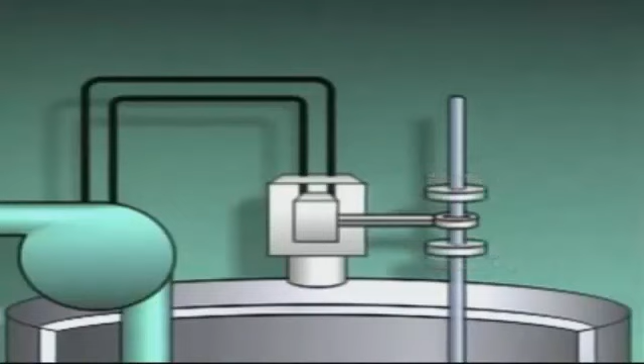The dead zone in this system is controlled by the positions of the two float rod collars. The dead zone can be reduced by moving the two collars closer together. A smaller change in level will then turn the pump on or off. But even though the water will be maintained at a more constant level, the pump will turn on and off more frequently. And this overuse could damage the system's components.

With proportional control, a controller's output signal is proportional to its input signal. In other words, if the input to a proportional controller changes by a given amount, the controller's output will also change by a given amount. To explain proportional control, we'll use this illustration of an automatic level control system. We'll say that a temporary disturbance decreases the demand for water from the tank and causes the water's level to briefly surge above its set point.

As the water rises, a level-sensing float converts the change in level to mechanical motion. The motion is detected by a measuring element or transmitter and converted to a pneumatic signal representing the value of the higher water level. This signal is sent to the controlling element or controller. The controller measures the signal, compares the signal to set point, computes the difference between the two values, and produces a corrective output signal that's proportional to the input signal.

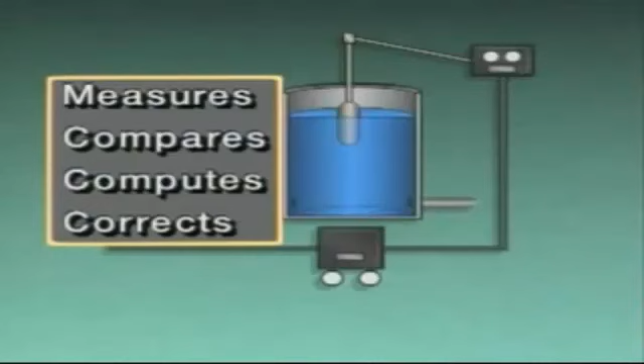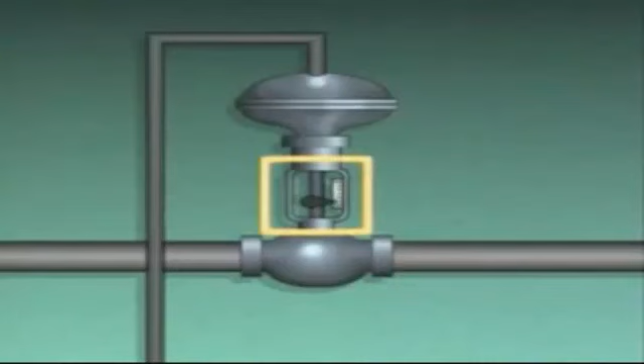The controller sends that signal to the final control element in the system, a control valve. The control valve responds by closing down to decrease the flow of water to the tank. However, because of process characteristics such as resistance, capacitance, and dead time, the level fluctuates before it finally returns to set point. We can tell more about how the temporary change in water level affected the system if we plot the control signals on a graph.

On the graph, the scale on the far left is marked off in feet to indicate the water level in the tank. The next scale indicates the value of the input signal to the controller in pounds per square inch, or PSI. The scale on the right indicates the value of the output signal from the controller. It too is in pounds per square inch. The dashed horizontal line represents the set point for the water level. In this example, the set point is 3 feet, which is equivalent to a 9 psi input signal to the controller and a 9 psi output signal from the controller.

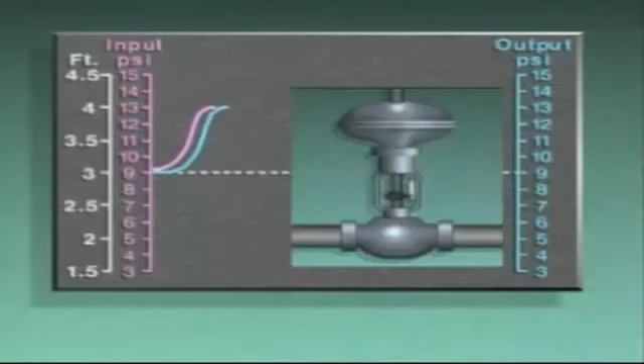In this case, it increased to 13 psi. The output signal caused the control valve to close, decreasing the supply of water to the tank. As the level in the tank fell, the input and output signals decreased accordingly. However, the process characteristics that we mentioned caused the signals to go through several fluctuations or cycles before returning to set point. With a temporary disturbance, process conditions return to their original state. So a proportional control system can normally return the controlled variable to set point.

But if a continual disturbance occurs, a proportional controller may not be able to restore original conditions. For example, this graph shows the input and output signals when an ongoing decrease in demand caused the level in the tank to rise. In this example, the control system brought the process back under control. But when it did, the level stayed higher than the original set point. That's because the input signal to the controller increased, then stayed high because of the continual disturbance. As a result, the proportional output signal stayed high as well.

The higher steady state value that resulted, that is, the higher level that's represented by the input signal, is called the control point. The difference between the variable's control point and its original set point is called offset. Offset occurs because a proportional controller produces only enough output to bring a process back under control during a continual disturbance. It may not produce enough output to overcome the disturbance and return the process variable to its original set point.

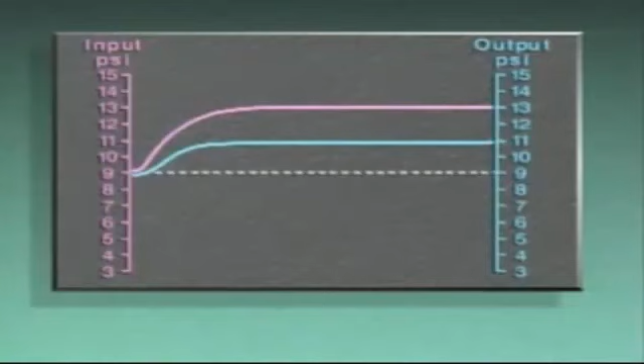Now, the signals on this graph show a proportional band that's greater than 100%. This type of proportional band is called a wide proportional band. With a wide proportional band, a large change in input to the controller produces a smaller change in output. The proportional band for this example is 200%. Since the output signal changes less than the input signal, a wide proportional band can minimize the amount of cycling in a system. However, there's more offset with a wide proportional band.

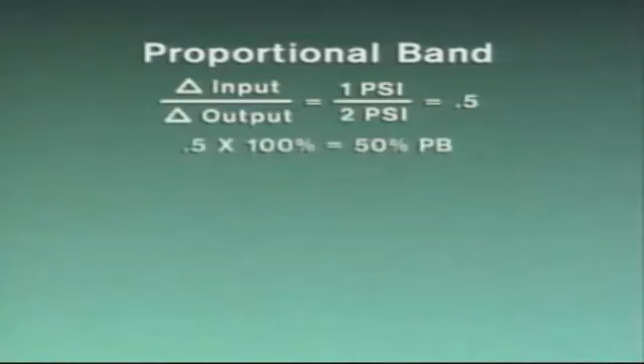Some manufacturers use the term gain when describing a proportional control adjustment. Gain is the inverse of proportional band, and it's expressed as a quantity rather than as a percent value. For example, a 1 psi change in input that produces a 2 psi change in output represents a 50% proportional band. But since gain is the inverse of proportional band, the relationship between the change in input and output is reversed. So the gain in this example is 2.

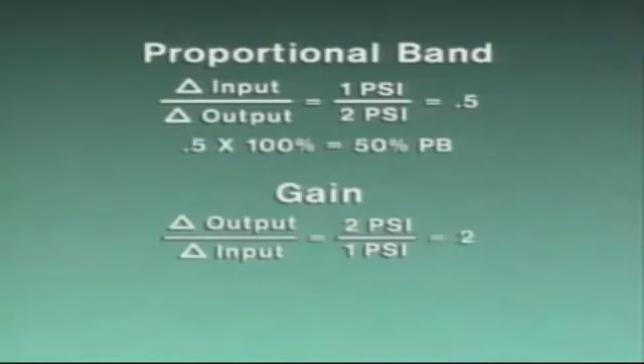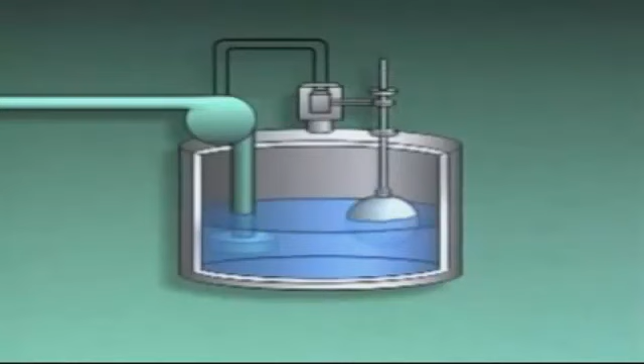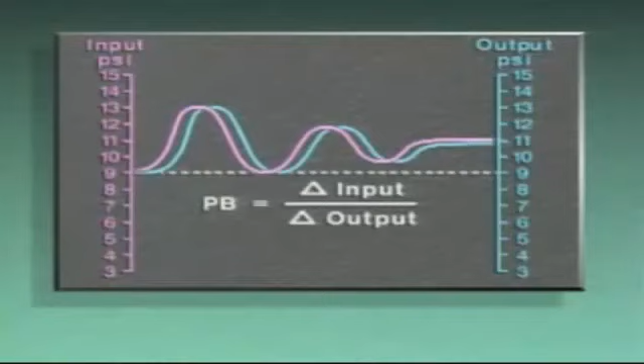Not all control modes can return a controlled variable to set point after a process disturbance. However, reset control is designed to adjust the output of a proportional controller to help eliminate offset and restore original process conditions. Reset action responds to a controlled variable's deviation from set point by increasing or repeating the amount of proportional control until the variable returns to set point.

Reset control doesn't exist without proportional control. In fact, it's actually proportional plus reset control, since it adds an additional corrective action to the proportional action. Also, reset control is sometimes called proportional plus integral, or PI control, because it's based on a mathematical function called integration. In any case, it's easier to understand how reset control works by looking at an example.

In this arrangement, an automatic control system is used to maintain the level of water in a tank. The input signal from the transmitter to the controller represents the level of water. The output from the controller adjusts a control valve in the supply line to the tank. If a continual disturbance causes a decrease in the flow of water from the tank, the level in the tank rises, and the input signal to the controller changes to reflect the higher level.

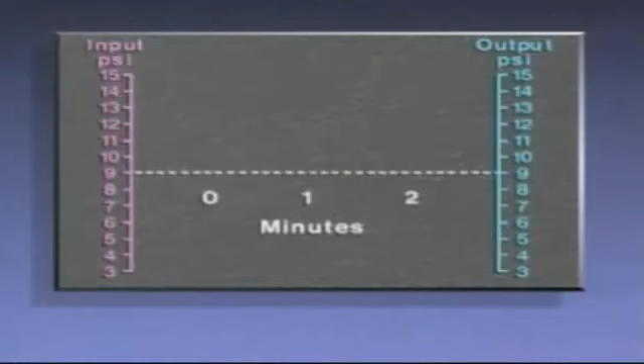During the first minute, the increase in water level caused the input signal to the controller to increase from 9 psi to 11 psi, which is a change of 2 psi. During the same 1-minute interval, a proportional-only controller with a 100% proportional band would have produced an output signal that matched the input signal. But the output signal from this controller includes proportional action plus reset action, and it increased to 13 psi, a change of 4 psi.

What this means is that the reset part of the control action increased or repeated the 2 psi proportional action one time in 1 minute. This is sometimes described as 1 minute per repeat, or 1 MPR. As the level of water in the tank dropped, both signals decreased, then fluctuated briefly before returning to steady state.

That's because the value of the control variable, represented by the input signal, returned to its original set point of 9 psi. In our example, a reset control action of 1 minute per repeat was able to return the controlled variable to set point. Often the amount of reset in a system can be adjusted. However, a reset that's too fast can cause a controller to overcorrect and cause the process variable to cycle out of control. In those cases, a slower reset may be needed.

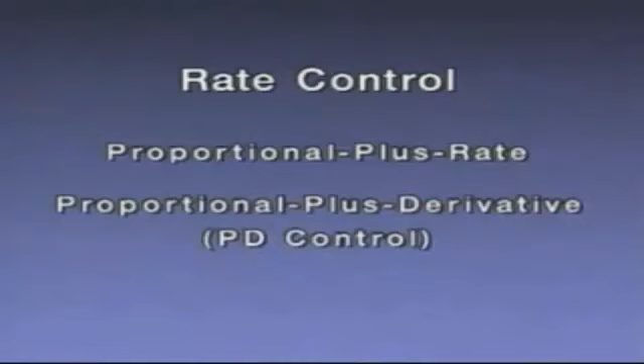In any case, when a process disturbance causes the input signal to a rate controller to change, the controller measures the speed or rate at which the input is changing and produces an instant boost to the proportional output signal. In effect, this action tries to stop changes in the input as soon as they're detected.

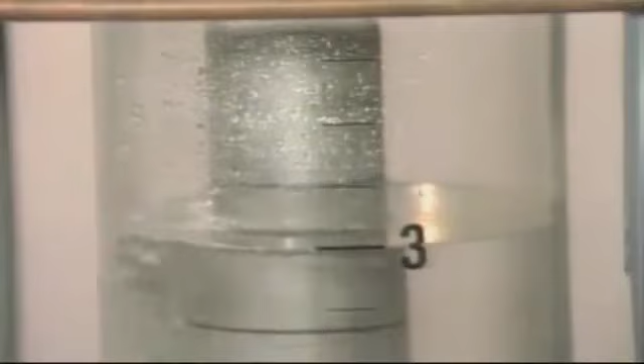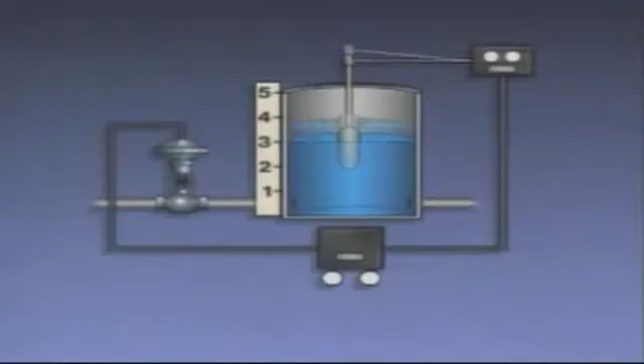To get a better understanding of rate control, we'll use this automatic level control system in which rate control has been added to a proportional controller. We'll say that a continual disturbance causes a decrease in the flow of water from the tank, which in turn causes the level in the tank to rise. If we look at a graph of the control signals from the process, we see that the rate controller responds to the disturbance by producing an immediate boost in output. This boost minimizes the water level's deviation from set point.

Then, a combination of rate control and proportional control stops the water level from changing and brings it down almost to set point. However, because rate control responds only during changes in the input, and because proportional control only provides a proportional output, there may be some offset in the process variable. In other words, as long as the level is at steady state, even with offset, the rate controller will not provide a correcting output.

When a process requires a rapid control action that eliminates offset, a control mode known as proportional plus reset plus rate control may be used. It combines the precise response action of reset control with the fast response action of rate control. Proportional plus reset plus rate control is sometimes called PID control. P for proportional, I for integral, which is the same as reset, and D for derivative, which is the same as rate.

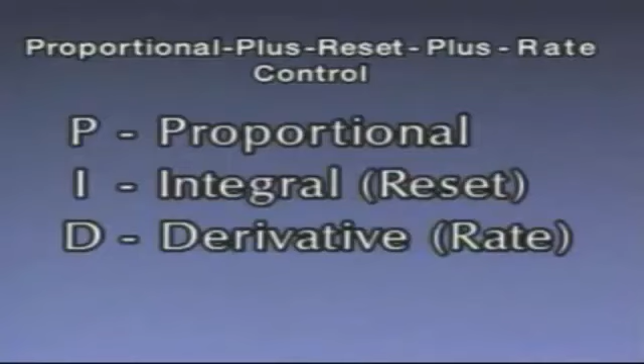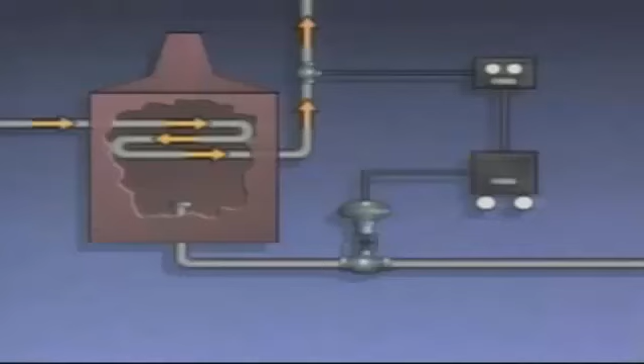One example of a process that requires PID control is the gas-fired oil heating furnace represented here. During operation, oil flows through a pipe in the furnace combustion chamber. Gas flows through a valve in another pipe to a burner. As the gas burns, part of the heat that's produced is transferred through the pipe to the oil. The controlled variable is the temperature of the oil leaving the furnace.

A sensing device in the oil pipe provides oil temperature readings to a temperature transmitter. The transmitter measures the temperature and provides a corresponding pneumatic signal to a controller. The controller uses that information to produce an output signal, which adjusts the control valve to regulate the furnace flame.

Since the flow of oil through the pipe is reduced, there's more time for the oil to absorb heat, and its temperature increases. The control system responds by sending a larger signal to close down the control valve. This reduces the gas flow to the burner and decreases the amount of flame. As a result, less heat is transferred to the oil, and the oil temperature returns to set point.

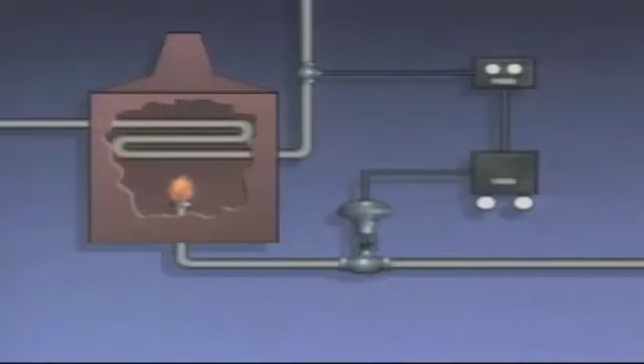As the rate portion of the controller output worked to stabilize the oil temperature, the reset portion of the output worked to return the oil temperature to set point. Soon, the combination of reset and rate control returned the oil temperature to steady state at its original set point. The final output signal also returned to steady state, but at a higher value. The higher output closed the control valve to a new setting to maintain the oil temperature at set point.

In this topic, we described how reset control, rate control, and a combination of the two work in an automatic control system. Now let's try some practice questions.

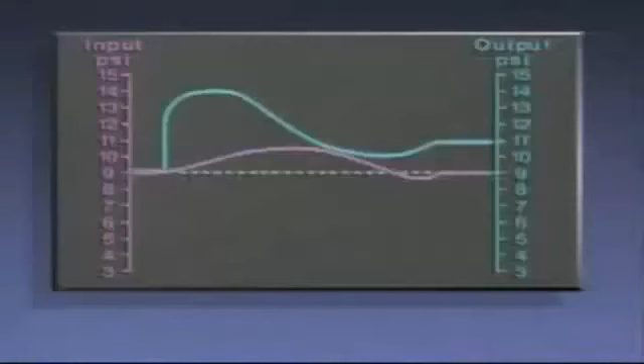Not all control modes can return a controlled variable to set point after a process disturbance. However, reset control is designed to adjust the output of a proportional controller to help eliminate offset and restore original process conditions. Rate control is a control feature that responds to the speed at which a variable deviates from set point. The faster the variable changes, the greater the amount of rate control action. This graph shows the input and output signals for a control system that uses proportional plus reset plus rate, or PID control.